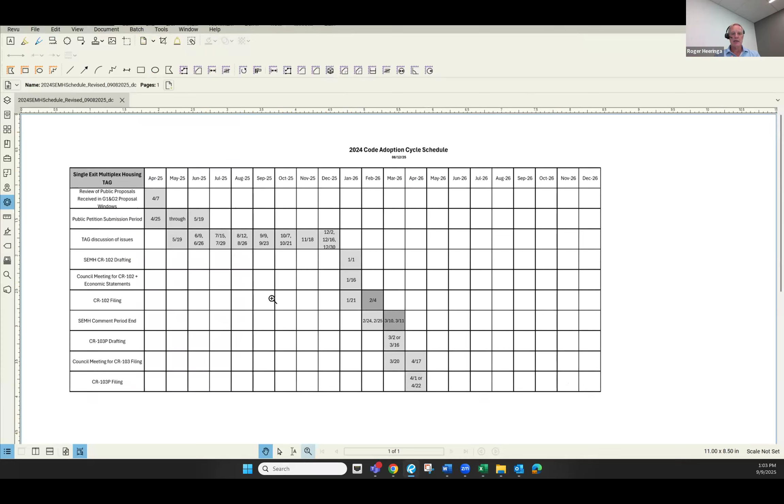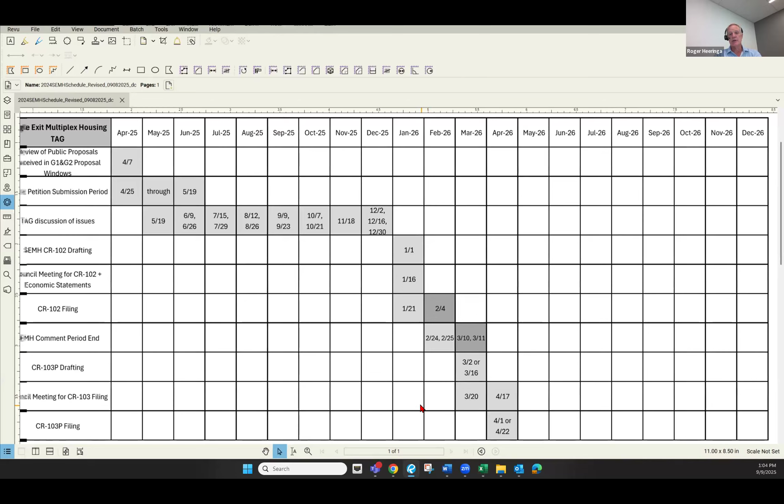So as part of the introduction in the meeting minutes, there is a schedule document. Dustin, if you can bring that up. I wanted to introduce this; it's kind of been an ongoing conversation. I know Patrick has weighed in, I appreciate that, but just what is our path forward? So Dustin and I have kind of worked backwards a little bit, and currently the CR is kind of the

end of January, the 21st or 24th is when we file the CR 102. What that means is after that, there's a comment period, a public hearing, and the drafting of the CR 103 document that gets final approval. Council, the CR 103 filing approval is at the council meeting on 3/20. I think the filing is 4/1 or 4/22. There's certain times when we have to file those.

Right, so some of this separates out. For the filing dates, we're using the code revisor filing deadlines as those dates. They could happen a little bit before them, but if we file before those dates, those are the dates we have to plan from. So the comment periods, if we filed on 1/21, it would end on the 25th, which gives us time for 2 hearings on either side of the state. Same thing with these darker ones here indicating a separated timeline, if we needed to file one filing date after that, then we have some dates in here, showing options for us to finish by the end of April.

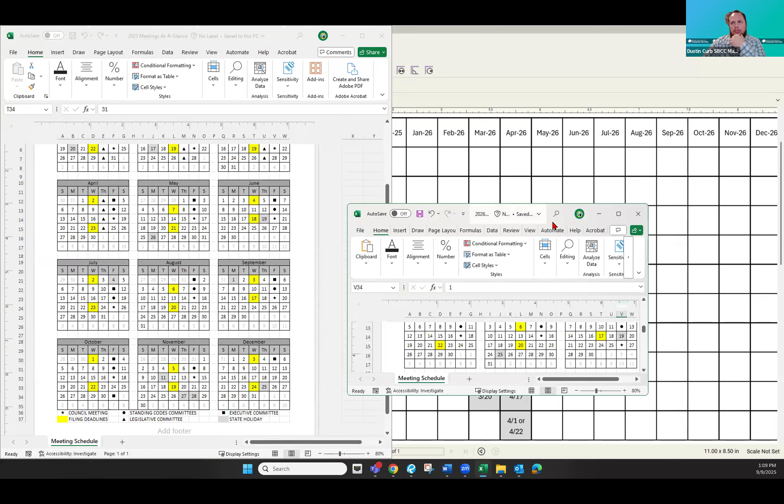Okay, go ahead. I'm just going to show some calendars that I have, to show kind of what we're working with, and maybe the changes that were made from the draft you last saw, Roger, before this got posted.

On the right here is a 2026 at-a-glance calendar. On the left is a 2025 at-a-glance calendar. These show our plan at the moment, following the same format as our 2025 meeting schedule. The yellow squares are filing deadlines, and the gray squares are holidays and things like that.

In September we did have a cadence of meetings. Today is the 9th. We would meet next on the 23rd, then the following ones would be the 21st, and then the 4th of November.

This week right here is the proposed week of hearings for the 2024 codes, so we won't be able to meet that day because we'll be having hearings running through. We have a holiday on the 11th, and then we're set up for the schedule we showed earlier to meet on the 18th.

We would be going through December, and if we have issues, the dates identified are the 2nd, the 16th, and the 30th. I'm open to changes on that part of it.

As Roger said, we've only got 2 or 3 meetings per subject left in the year to handle these topics. I had 3 or 4, and I think single exit is farther ahead than multiplex. If we end up needing an extra meeting toward the end, 1 or 2, we may need to do that. Hopefully not, hopefully we can get through it.

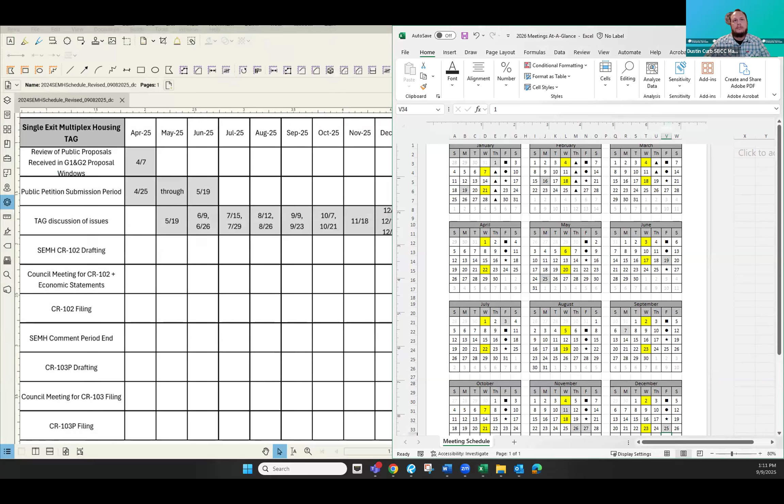Okay, Patrick, go ahead. I have a question for Dustin: is 2 full weeks in January going to be enough time for the staff to do the CBA and SBEIS for this?

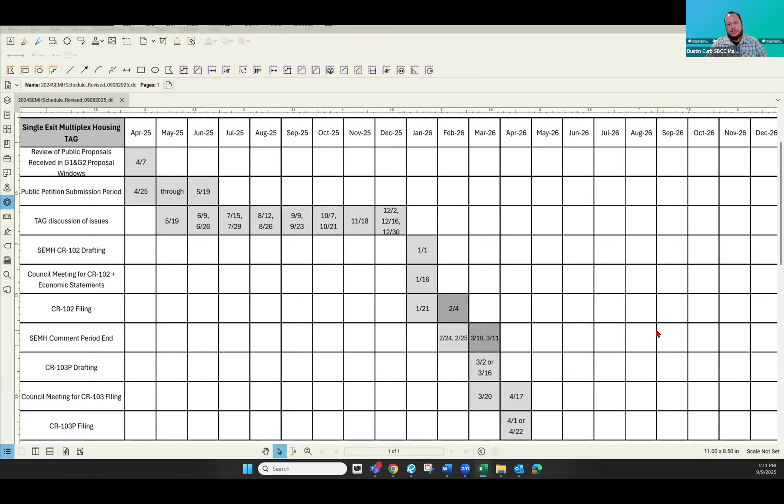If I have the information for it, yes, we should be able to do that. I'd like to have the technical language nailed down by maybe the second half of December, then have this group embark on that economic discussion with another work group meeting on economic impact for these topics as we approach January. I want to get that information by January, and if I can be set up like that, yes, I think that's a reasonable timeline. Okay, thank you.

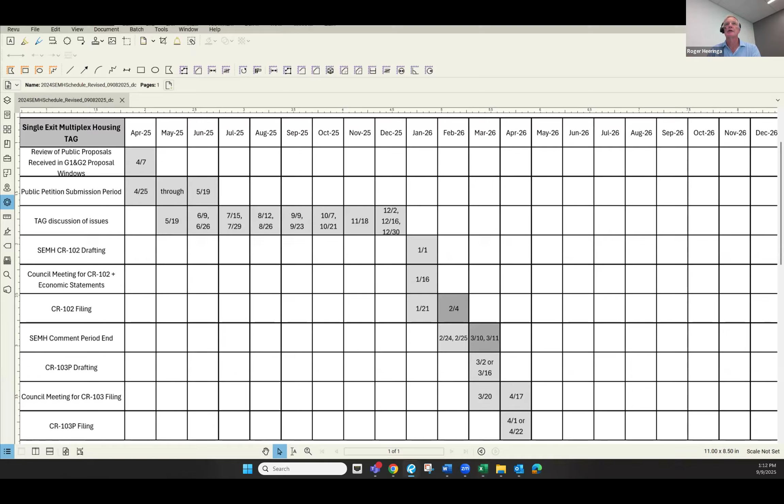All right, any other comments? That was a long introduction, but that's kind of where we're at, setting the table. So let's move on and keep moving. We have review and approve the agenda—if you could bring that back up, I could have a motion and a second, and then any discussion items.

So now we go to item number 4, which is the single exit work. Ardell, you've been doing an excellent job of working our way through that. I think the right way to do this would be to take where we left off on this spreadsheet with the issues item. I guess I will ask if you're willing to do that again, Ardell.

Sure, I'm not sure where we left off, so Dustin, if you can remind me there, I'm getting lost in our 4-week gap here. We left off on the 12th - it was the parking garage stuff, and we left off at amenity spaces within here. I just want to make sure everybody notices this got moved around as part of the stuff we were doing, to try to group it with other stuff we were talking about. But this doesn't have a discussion date on here or any input, so we left off at amenity spaces, and I'm getting the document pulled up here.

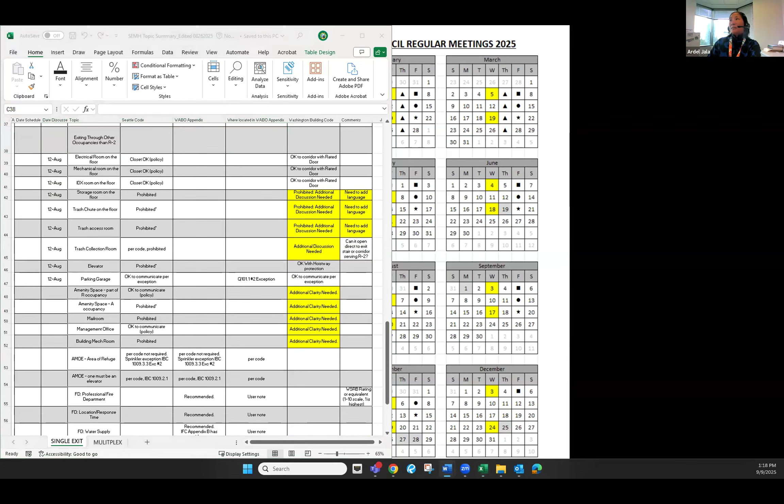Does it work if I show it side by side like this, or is it too small, whatever works for everybody, I can move it around. Works for me on my end. Okay, all right, yeah, that works.

So the code language is item 2, and all of these are about communication. So this list of areas where it says additional clarity needed - are we coming back to this right now? Is that our starting point, or do I go to area of refuge afterwards? I think let's do the area of refuge here, and we can circle back to this. It's been a while and I've got a lot going on with the other codes, but I believe we did talk about this - I don't exactly know specifically when and how that's all interconnected, where this note came from. So I have to go back and check some notes, but let's start at the area of refuge.

The area of refuge - because the presumption is that this is a sprinkled building, it would then comply with the sprinkler exception. So there's no provisions within the single exit baseline proposal to do anything beyond code - a single exit building that is sprinkled would not be required to provide areas of refuge.

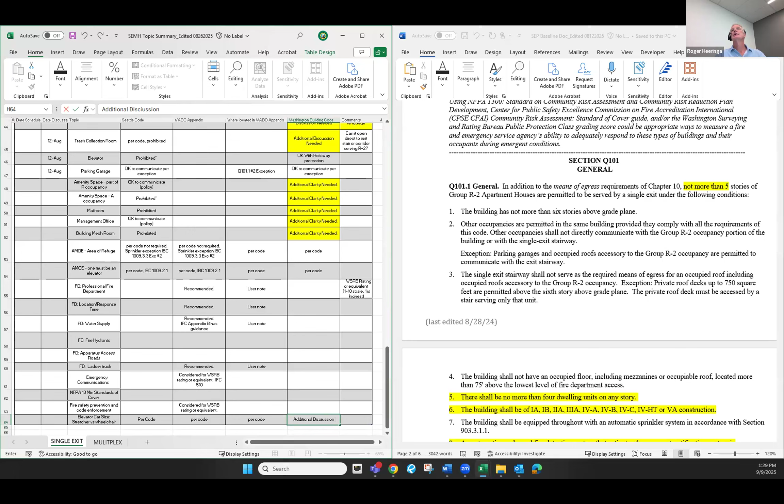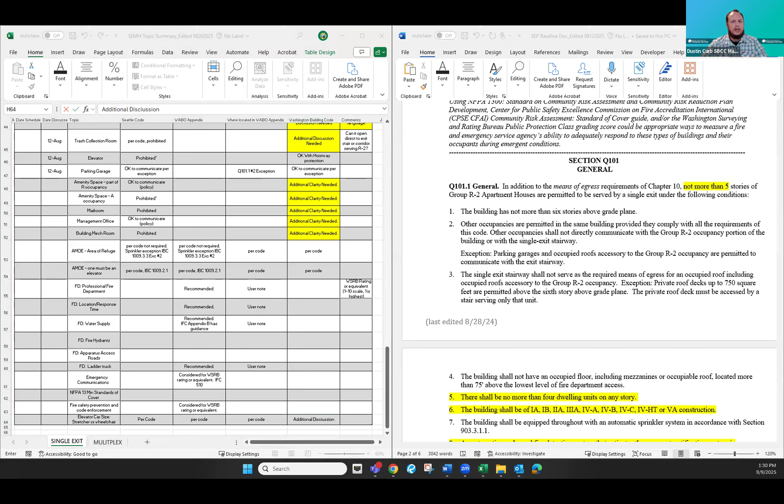Do you want to bring that up, Dustin? Yes. So first, I'll have down the WSRB rating document that we have up on there. And I think it addresses our next line - we have talked about what a professional fire department would look like. We may have shown this briefly as well, but we don't have any notes in our spreadsheet for it. And I believe this came to us from Dave Kokop. Yeah, Dave, your hand is up - you want to comment?

Yeah, I apologize, I was not in the last meeting, but in further communication with the Washington Survey and Rating Bureau, they have requested we do not utilize their data for code basis for this tag or for other building codes for the state - it's just for their customers. So that is the reason why we have this separate criteria: the fire marshals group that participate on this tag went together and put together our documentation of what we felt it would be, as WSRB has requested, please don't use our information.

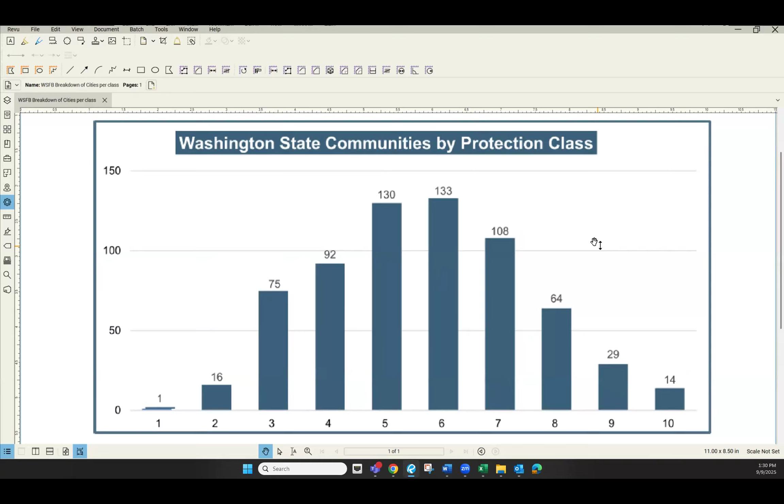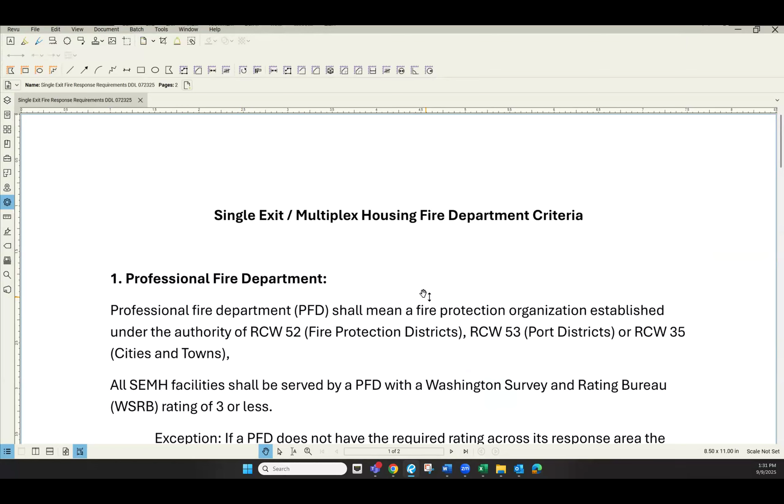So the numbering system is good for us to look at as a baseline, but we've got to come up with our own language. We can't say if you're rating a 3 or less, that needs to be removed.

Now, there is some general discussion as to what those bases will be. I'm not sure where we're at with that, Mike. So, Dave Lynham, you were talking about some of that. Unfortunately I missed last meeting, so I don't know if you have any other background, Mike. Yeah, I think where we went back to, since we've scrapped WSRB at Bob's request, is coming up with prescriptive criteria for the fire department, and that's where we've left off and what we really need to dive into discussing. I think everything else we were pretty in agreement on.

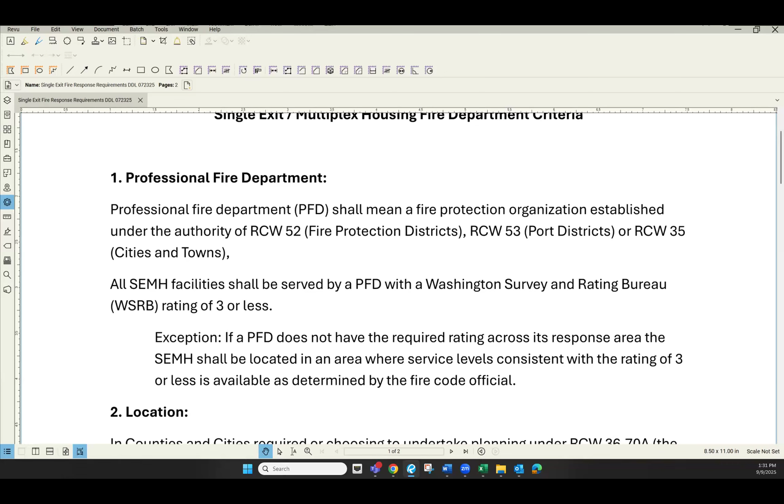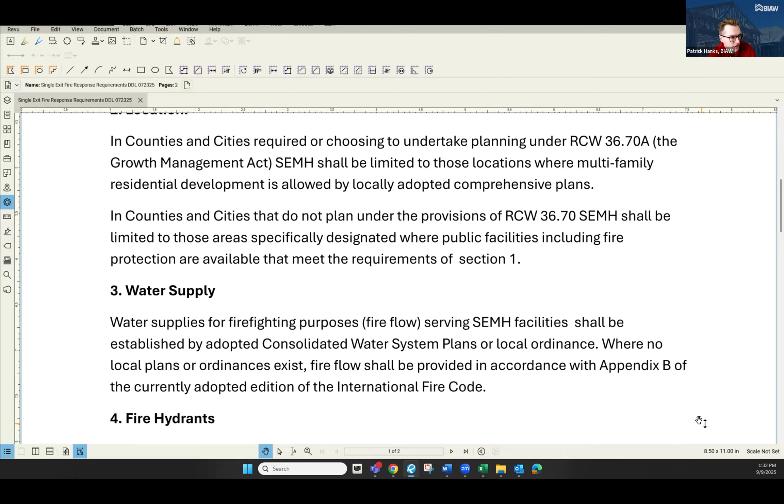Patrick, go ahead. Well, I'm glad to hear they were not using the data. I was concerned that having it be 3 or less would leave out the lion's share of cities from being able to utilize this code. I understand legislation says to consider, I forget the exact terminology, the fire risk and fire provisions. But we want to make sure this is going to be a widely available option, and not heavily restricted to just a small minority of cities in the state. So I'd be interested in hearing more about what certain qualities or how you're going to be making that determination without using the WSRB data.

Thanks, Patrick. I was about to try to pull up the legislation, if I can find it here. Oh, you have it? I can pop it open. Sorry, you've got it. Oh, and that's not it. Substitute Senate bill.

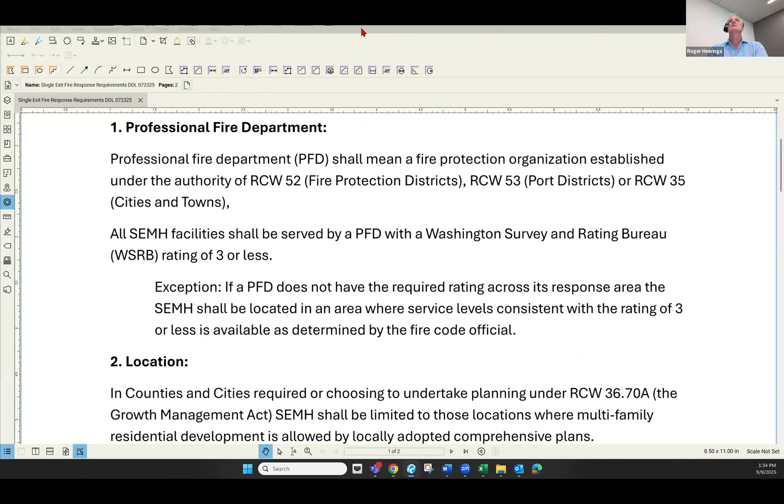So Dave or Mike, it sounded like you have a definition for professional fire department. What is our backup rather than a WSRB rating? We've got a document going around that actually defines a professional fire department, really trying to write a definition based on the RCW definition. Dave Lyman isn't on, but he did a really good job of putting together a baseline that calls out RCW 52, 53, and 35, which also includes the entities allowed to establish fire departments.

But the biggest thing we're looking at, diving down to what that professional fire department actually is, is the response. We feel we've got a really good handle on dealing with water supply. There's existing code we can lean back to, Appendix B for fire flow, and Appendix C already tells us where our hydrants need to go, so we can bring that in. Fire apparatus access roads is controlled by Section 503 of the Fire Code and Appendix D. So we have a really good place to go that is already international code language.

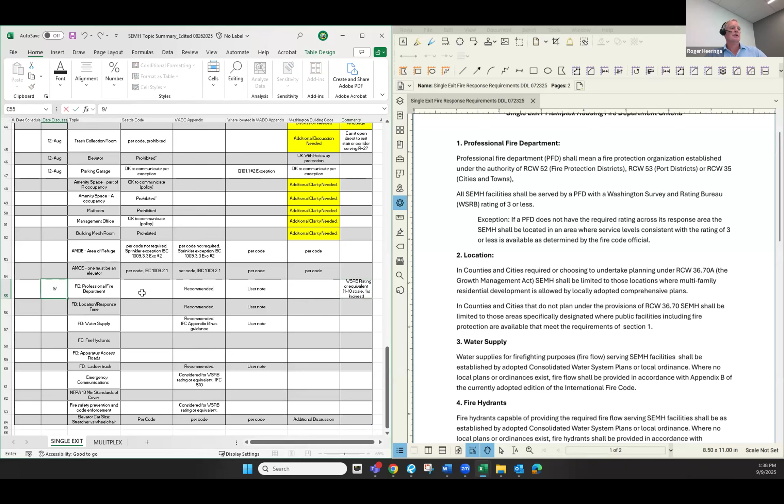Okay, I'm going to then suggest that we postpone all of those fire department, at least all the FD ones that we've got there until the next meeting. And if we can get that information, I would ask Mike to get a draft now if you're still kind of trying to clean up the professional fire department. That can come later, but let's get it out, probably send it to Dustin so he can distribute it out to the tag members.

I was also going to add that we are involving other fire groups, so the fire chiefs for instance, and some others, to provide some feedback on us. It's taking a little bit more time than we thought for that. But we're trying to get as much involvement of each group of the fire service to be able to provide us good information so that we don't put something out that they're not going to be too happy with. So we want to make sure that we have it right before we bring it to the tag.

Okay John, go ahead. Yeah, I was just wondering Roger, if we really need to postpone all of them. I mean, water supply, fire hydrants, fire apparatus access are all basically per code, right? So if I'm understanding that correctly, or at least we can point to the appendices that they're referring to in that document on the right on Dustin's screen there. So I think we might be able to dispose of those at least and not have to come back to them.

That's fine, I was kind of thinking we might hit them all at once, but Dave, go ahead. I was going to add that one of the things that is a concern within the language here is we talk about the fire access roads. It doesn't include the addition of Section 503, and Section 503 is not adopted by the state. So that is one of the problems I had since I was on the council, trying to get that kind of fixed, because it basically removes the fire access road requirements and puts it into the local hands.

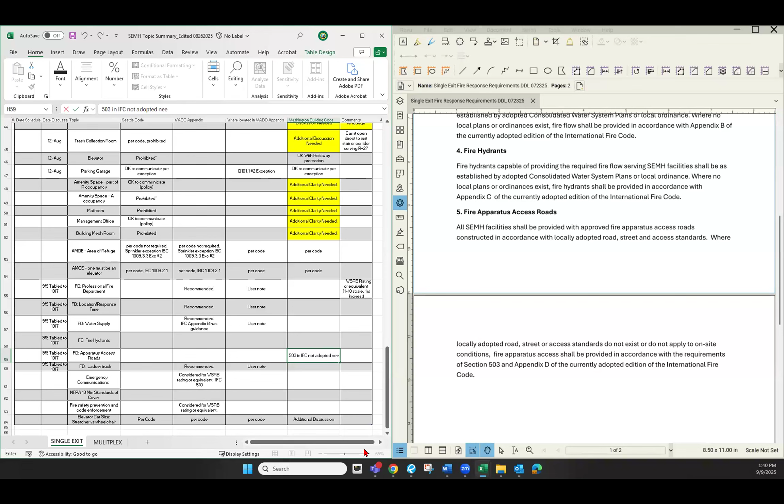So which ones are per code then? The water supply and the fire water hydrants? Yes. And you said the fire hydrants as well needs to. Yes, fire hydrants and water supply are per code. Correct.

And you can take the tabled, yeah, take those two off. I'm going to ask, is there anybody, again, we will have time to go back through this. This is kind of our first pass, and I know we're going to want to look at everything together, but anybody have concerns about the per code for those two?

Hey Roger, this is Messer. I just want to add one thing about our per code for the water supply and hydrants. We are taking those from appendices, it's Appendix B and Appendix C. Both of those at the local level are typically not adopted. So what this would do is force those jurisdictions to use those appendices when building the single exit or single stair.

And is that an appendix to the fire code or the building code? Appendix to the fire code. Yeah, and I do think we need to be careful. I know as part of we do have a consideration, I can pull up, I think that we are directed to put this in the building code.

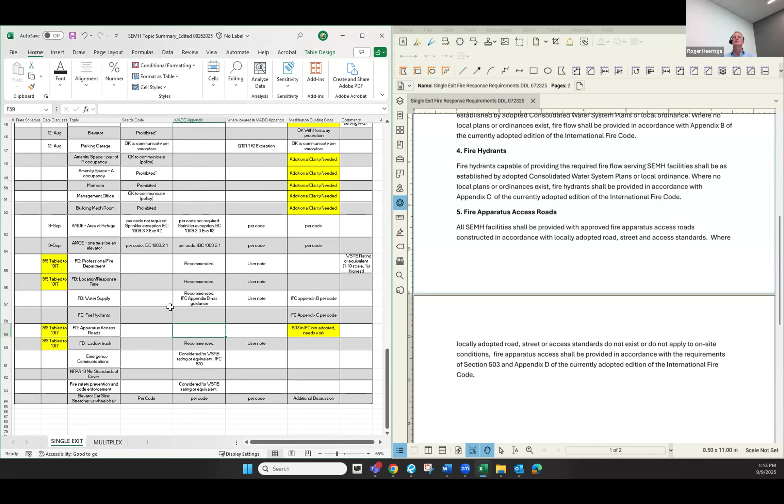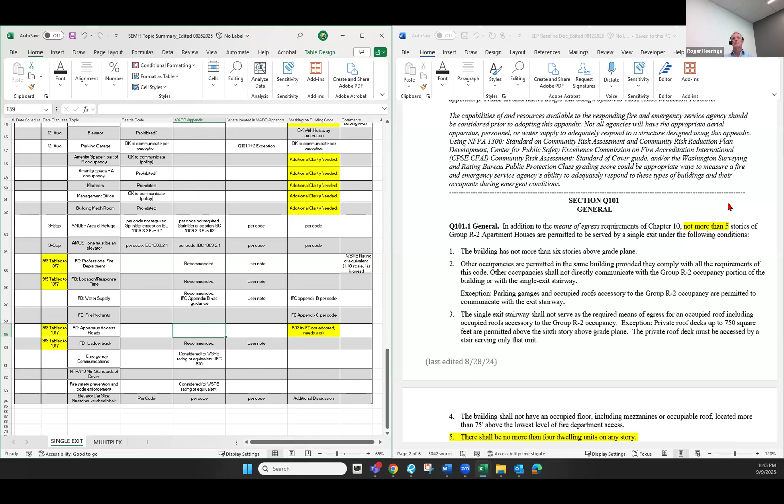Yeah, I do agree, we need to be very clear with that. Maybe it can be dealt with in the user note up top, since per code is still building code. I just want to make sure that if we're relying on a fire code, is that included? Are people directed to that? I think you can direct them to that in these provisions here. But I wanted to note that the user note is going to have to change substantially, based on what we're doing. Remember, we wrote that originally thinking this was going to be optional, so that's going to need some substantial editing.

Well, if we can just keep that in mind - there is a fire code, building code question.

Emergency communication - I don't know if this is Ardel or Dave or Mike who wants to take emergency communications. I'll lean on my colleagues for this one - I'm not remembering what the emergency communications was covering. Was that two-way communication in the stairwell? No, I think it's just built into the WSRB rating - the 911 PSAP system.

Yeah, that's what would be part of the WSRB. I'd have to look to see what else, but as far as your PSAPs - public safety answering points, your 911 centers - fire departments have very little, if any, control over them. So I'm not exactly sure what we could even write other than that a 911 system is available. I concur, Mike, because it's very difficult for us to say any particular requirements. I think we just have to say there has to be a dispatching process or dispatching capability for that jurisdiction to be considered.

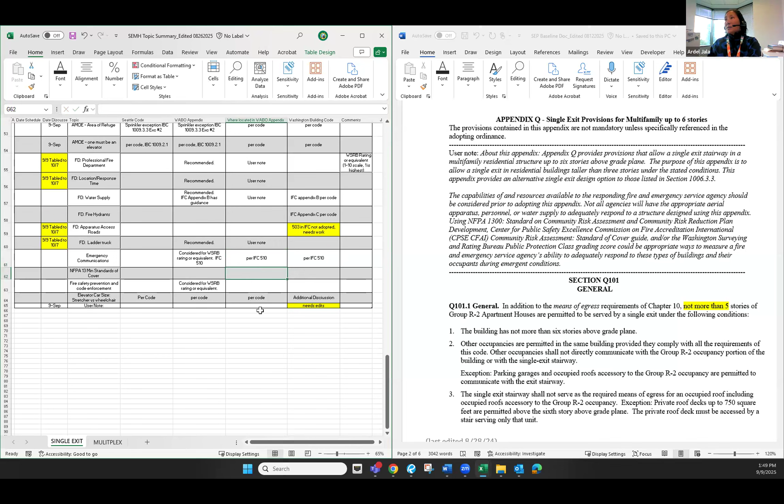NFPA 13, minimum standards of cover. I can start it and then I'd be happy to pass it off to our fire colleagues. Where this is covered in the proposal is item 7, so if you want to scroll down, Dustin.

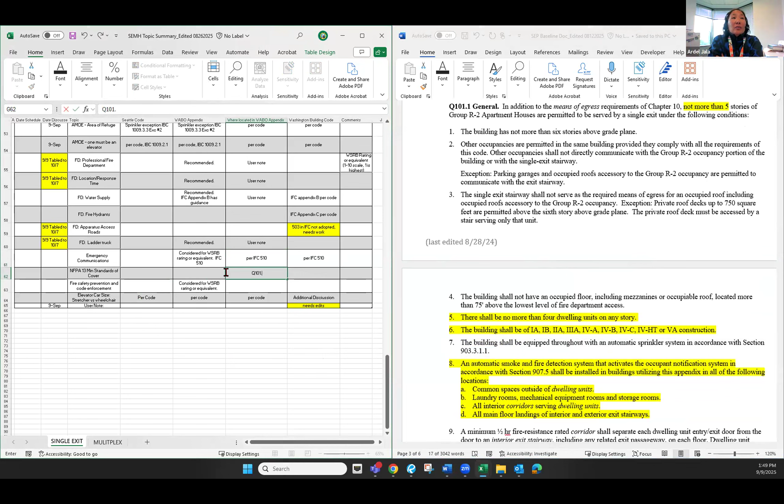This is again what's mitigation. And so in the base proposal, it's requiring a full 13 system. Dustin, I don't know if you're able to bring up Washington State Code for 903.312. One moment. But really at 5 stories, the base code already requires an NFPA 13.

So where this is impactful is that a 13R is permitted at 60 feet in 4 stories. Do I have that right? I'm going to defer to my fire folks on the call. Yep, okay. And so this is an enhancement so that if you're using a single exit, you would always be required to use a full 13 system.

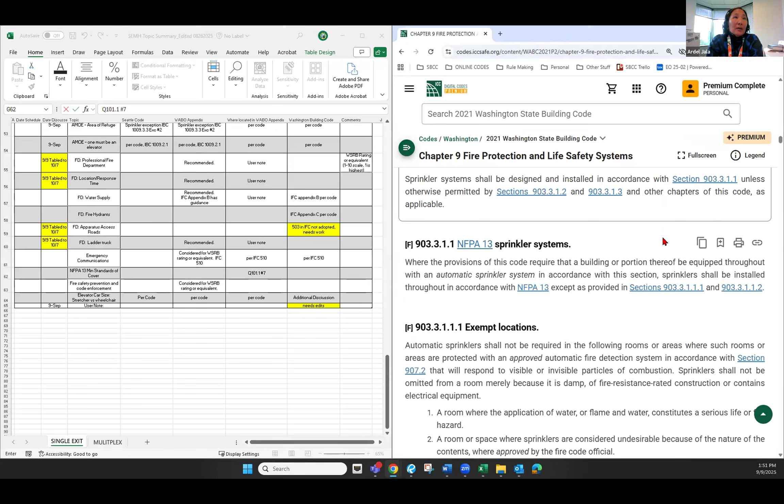And then Dustin, if you don't mind scrolling down to the 13R scoping, thanks, that's where it is. Up to and including 4 stories in height and buildings not exceeding 60 feet above grade plane. So a 3-story building with a single exit would be per the table. A 4-story single exit can use these new single exit provisions, as can a 5 and 6. But the 5 and 6 is already required to use full 13, while a 4-story, if per code, is permitted to use a 13R.

What the WABO work group decided was to require the full 13 in all single exit buildings. There's been debate about that, whether to require it or not, but that's where we landed. And then the difference between 13R and full 13, again, I'm going to defer to my fire colleagues on that.

Ardel, I think you hit the majority of it. The other difference between 13R and full 13 is your flow coefficient, so you're getting double the water flow. Your 13R is 0.05, so that's a 2-head, 26 gallons a minute, or a single head at 17 gallons a minute. When you get into your 0.1s, which is light hazard 13, it's 35 gallons per minute, so you get more water flow onto the seat of the fire, whatever head activates. Another big difference between 13R and 13 is the dedicated fire line. 13R is similar to 13D, where you can tap your fire line from domestic water. In this case, you get a separated dedicated fire line that runs your 13 system. And then the last difference is it's a full covered system, where your 13R only covers occupied spaces.

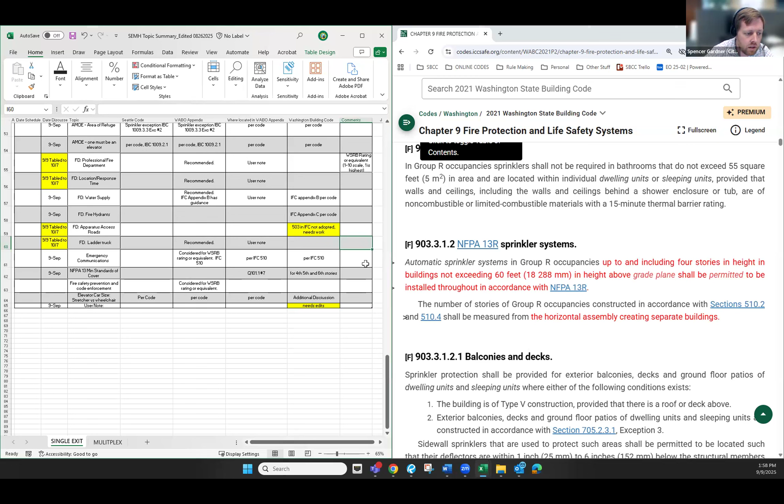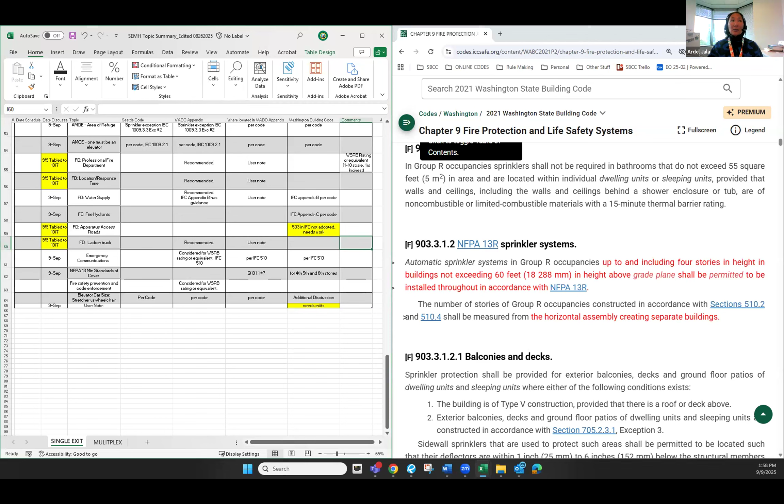Yeah, just a question. If we were to decide that the 13R is acceptable for a 4-story building, it sounds like that's already in the requirements. So essentially, it would be a question of just striking the NFPA 13 requirement from the appendix, and there would still be the full 13 protection for 5 and 6 story and 13R protection for 4 story. Am I understanding that correctly? That's correct. If the committee makes a decision to maintain a 13R, then you would stick as base code. If the committee is seeking to maintain all single exits using the appendix as full 13, then you would maintain item 7 in the proposal. Thank you.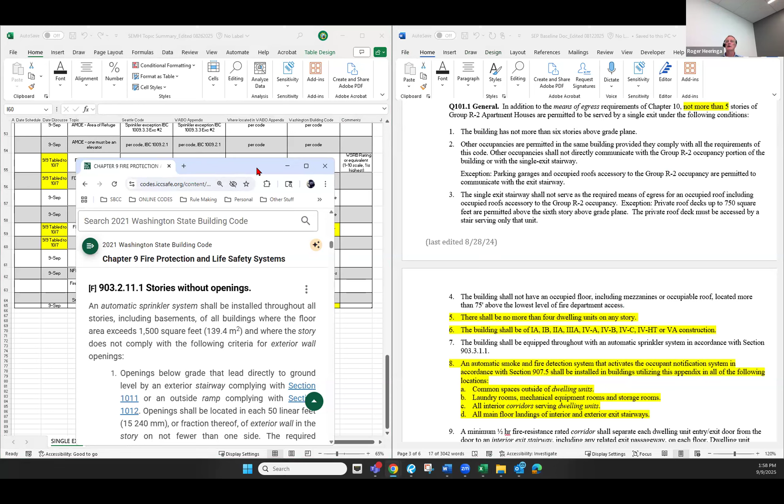And I'm fine, if there is continued conversation about that, we can revisit that. I think it's a good conversation. I certainly understand it's a reasonable enhancement as far as I'm concerned, but I agree with Todd, what added performance is it? Are we getting, and I'm also just asking for kind of a ROM cost, what is the cost for that enhancement?

Spencer, go ahead. Yeah, it sounds like, well, I'll just say I would prefer, I think, to keep it at the base code. Okay, if you're soliciting different opinions, there's mine.

John, go ahead. Yeah, okay, I would support keeping it as the full 13, mainly because of keeping in mind that the 13R at 4 stories is predicated on 2 exits. I mean, it's not predicated, but it assumes that you're going to have 2 exits. Yeah.

Okay, well, let's, Dustin, I guess we need to note that we will revisit that. I think there are multiple opinions, so however you're marking that, I forget exactly.

Ardel, I was going to ask also. I started writing some things down, but eventually I think this committee is going to have to come up with a list of the enhancements. It would be a good summary as we present it to the public and to the full council: here are the enhancements we've asked for above code. I don't remember them all right now, but eventually we should be able to explain that.

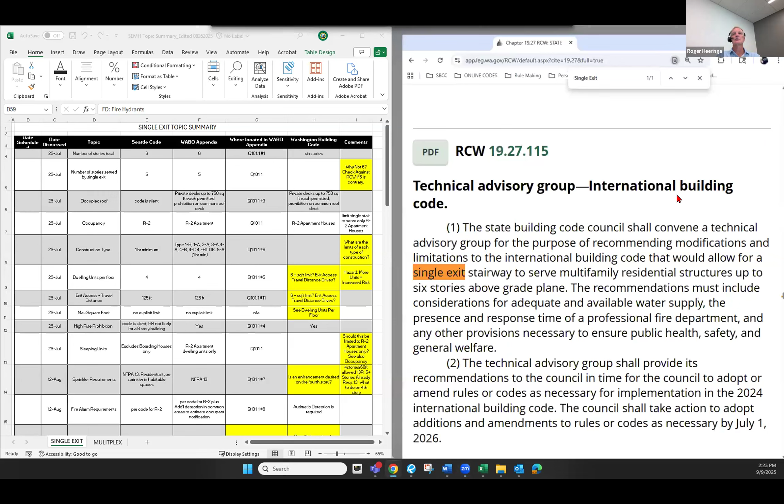When I read this, the question on number 1 and 2 is it's 6 stories - whether we are allowing 6 stories, however, the single exit only serves the upper 5, right? And the ground floor is served by either direct exit from the units or a different means. So question number one is, do we meet the language of the code? When I read the first sentence - limitations to the IBC that would allow for a single exit stairway to serve multifamily residential structures up to 6 stories - this is my opinion, but by allowing a 6-story where the upper 5 levels are served by the single exit and the ground floor is served by another means of exiting, that would be the recommendation.

That would allow for a single exit stairway to serve multifamily residential structures up to 6 stories above grade. I think that if we limit it to 5 stories for the single exit, I believe that we are meeting the RCW. I don't have a legal opinion, that's my opinion, but then there is the question, do we allow the single exit, basically all 6 stories, to go through the single exit and exit out? Is that - Ardel, am I saying anything contrary to your understanding?

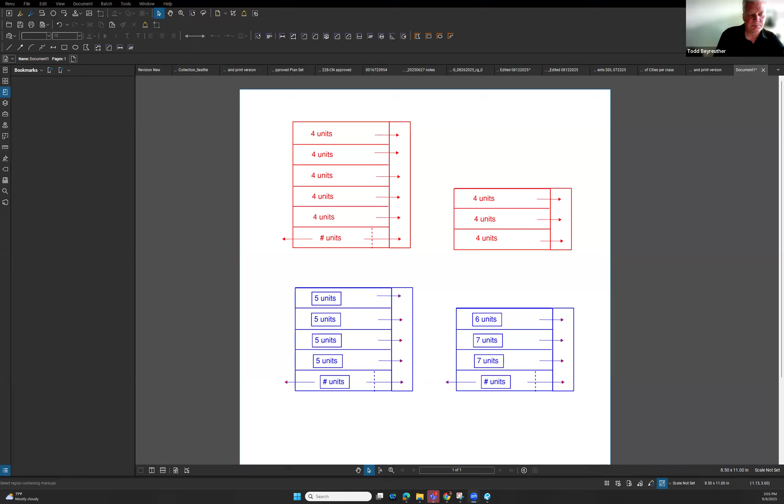John, go ahead. Yeah, so in answer to Rich, I think the number of actual people, I don't think there's going to be a bottlenecking just based on that. You're going to be limited still by the overall travel distance, the 125 feet, and the 20 feet to the stair. So you've got 20 feet from your door to your unit to get to a stair, assuming we don't change that. And that's going to limit the number of units to begin with. There's only so many doors you can fit in that space viably. And even so, the capacity theoretically of a door is pretty high when you look at the width versus the occupant load. So theoretically, you can get like 0.2 inches per person, something like that, I can't remember exactly, but you get some big numbers. So I don't think the number of people on a floor will be the issue.

Yeah, builders are very creative, and architects and engineers are very creative, and when we see it on the other side, it's kind of mulling through Roger's proposal. Oh believe me, yes, I know what you're talking about. However, I think the other safeguards and guardrails in the system in the proposal will prevent some of that from going too far. And I had something I was going to say to Roger, but I forget what that was.

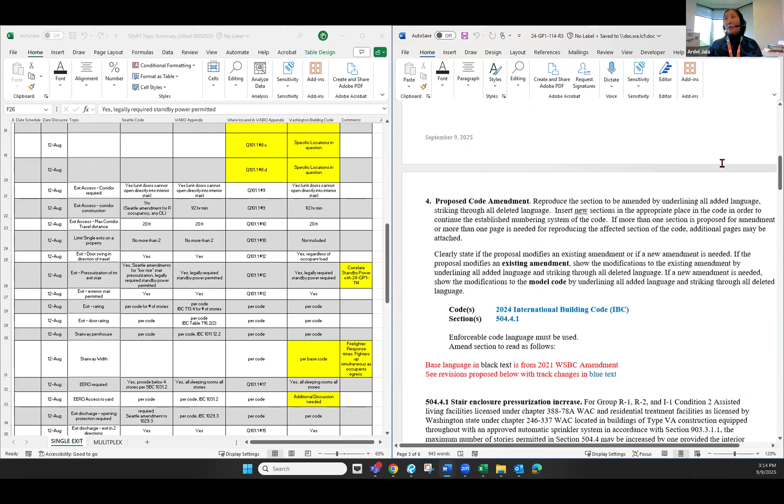I know that Seattle has a different allowance. So is that then punishing Seattle and Bellevue and maybe other jurisdictions that do allow tap ahead of the main, that would not be allowed in this proposal?

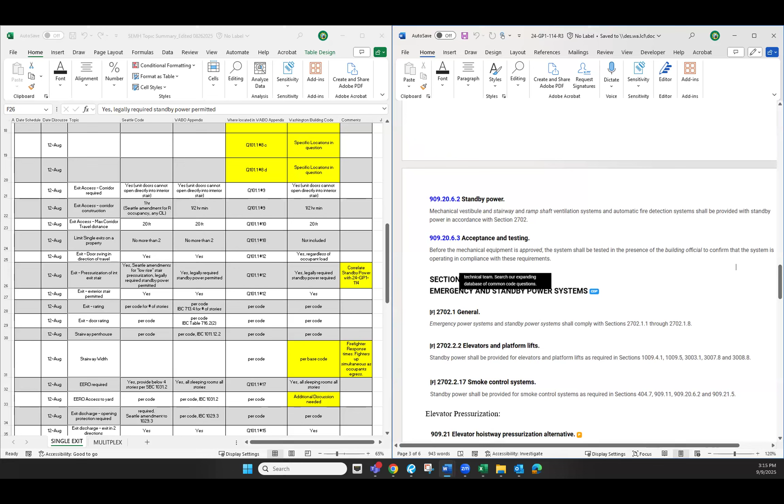I think I would interpret that as it's up to the local jurisdiction. It's that the local jurisdiction could make that amendment still. I would.

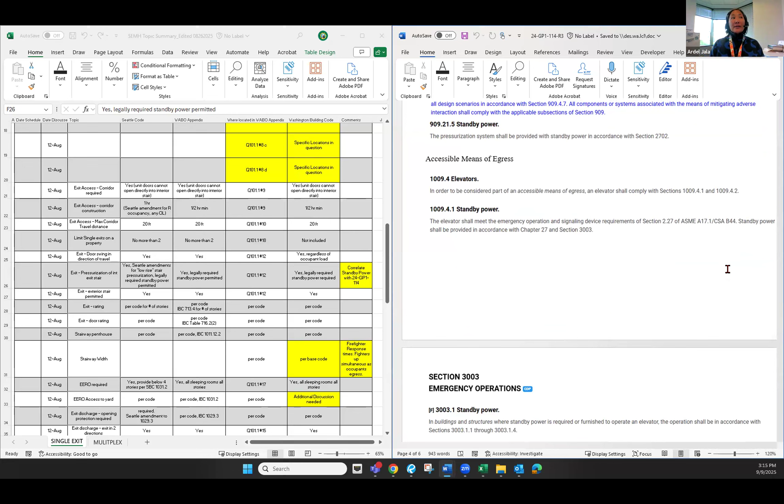But as a state proposal, I think if you're going to allow tap ahead of the main in this appendix, then it needs to be discussed as well with other legally required standby power requirements at the state level. Yeah, I was just seeing that. I was thinking that this proposal would allow legally required standby power, and then it's up to each jurisdiction. I was seeing that this actually prohibited tap ahead of the main power in this proposal, which then would not allow Seattle to use tap ahead of the main.

That makes sense. Yeah, John, I think what Ardel is saying, though, with certain caveats, is that the jurisdiction could amend this, and I would expect that. I will continue to push for the amendment. Locally, similarly to how we currently allow that amendment where the state would not allow it for the story increase, we allow it for the story increase. Seattle has different requirements for the story increase even, so, yeah. Correct. Thanks.

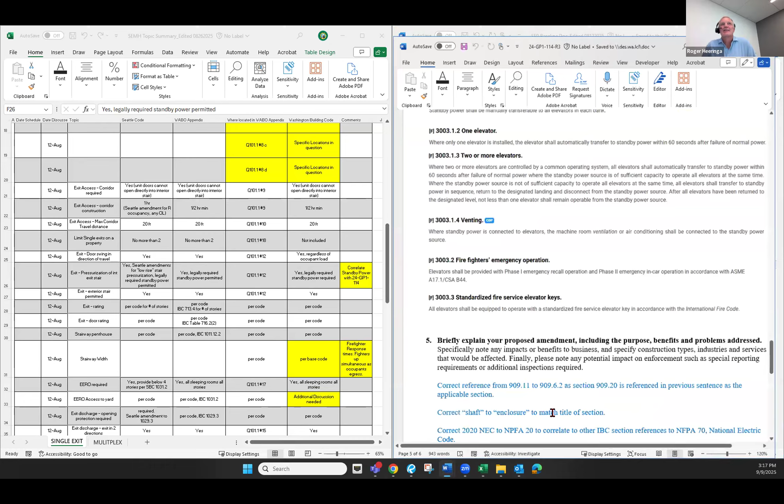Roger, real quickly, I'm not an electrical engineer either, but having dealt with this for a while, and the controversy, quite frankly, over tap ahead of the main - there are different ways of doing what they call a reliable source of power, or standby. One of them is a generator. The other, that other people have used, is supply from two different grids. Some buildings have access to power - downtown, Seattle City Light has two different grids that go through there, and you can tap into them separately. So you've got a second source of power that's reliable, the assumption being that you don't lose both at the same time.

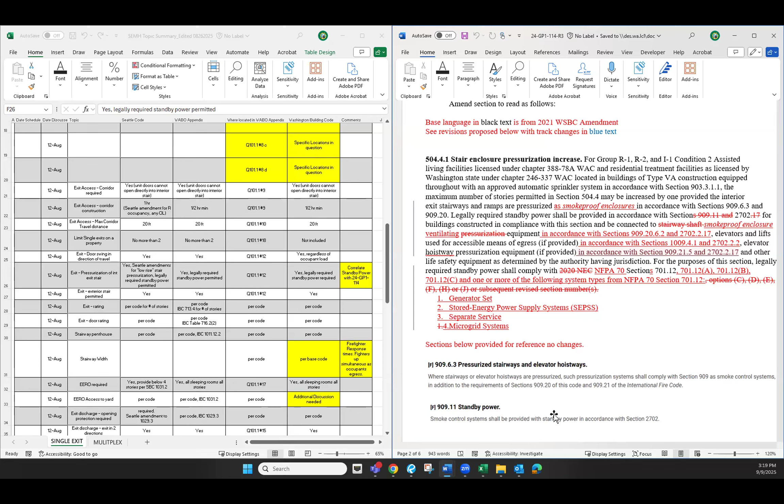I don't know some of the other ones, but the other one I'm familiar with is tap ahead of the main. Basically you have one line that comes to the property - one goes directly to the panel, your normal panel, so that's your normal power. Then there's another one, a tap off of that, that goes to a separate panel, and there's a transfer switch that flips on if the main panel loses power. Some people do not consider that to be a reliable source of power, because if the grid goes down, the building loses both sources of power.

So there's no backup if the whole grid goes down. Seattle has accepted that - the way I think about it is, if the whole grid goes down, you've got other problems. Okay.

So where are we at with this? I've got the 114 pulled up, looking at the standby power sections, they all refer to 2702, but is there anywhere specific here you want me to navigate to, Ardel?

No, I just want to flag that the language in the appendix should be consistent with the language here, for the purposes of this section. The last sentence: legally required standby power shall comply with NFPA 70. And this code change proposal is to align this section with the updated NEC, right? With the updated NFPA language.

And so wherever the building code tag ends on the recommendation for this section, the single exit appendix should have the same language. That's the language in yellow, just correlating standby power with this proposal. It's the same requirement for legally required standby power, and it should be consistent through the state code.

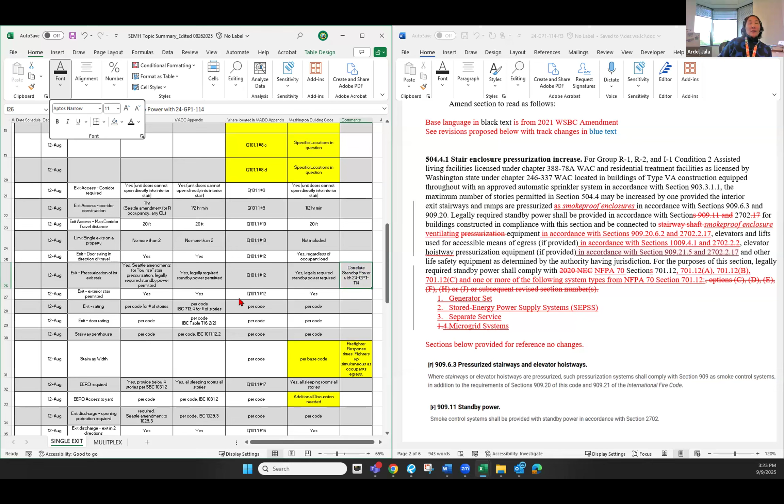And then the other item that was brought up today was the stretcher - I don't know, I think Todd, that was you. Is that one you wanted to bring up today? Sorry, did you just call on me? Yeah, you had brought up the stretcher requirement for conveyance.

Thank you, yep, so I was trying to come back to it instead of taking on another topic. It's more of a legislative request - it obviously did not pass. So it's a question that comes to the council, and if there are any opinions for or against, it would be helpful as we have a meeting in October with the legislature.

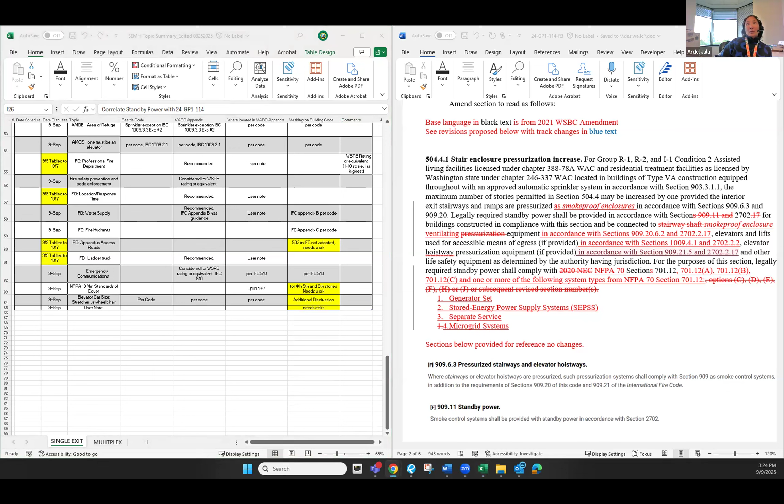So does everybody on the call know the issue? Maybe not. Todd, do you want to go ahead and summarize it, or do you want me to bring it up? I think you're probably better qualified. I could fumble around, but others on this call probably could do it better than I could. Thank you, hold on, let me pull up the state code requirement.

Dustin, are you able to bring up the stretcher requirement that's in Washington code? I believe it's in 30 - Seattle moves it around, so I apologize. Yeah, it's chapter 30, give me one moment.

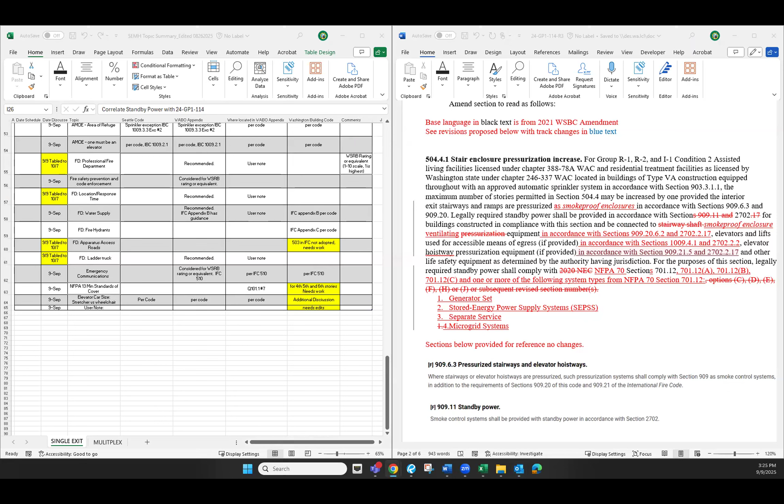Jonathan, do you have a comment while they're pulling that up? One other thing that went with changing the stretcher-sized elevator was to take elevators to an ISO standard. And the industry was really against that because there are no qualified mechanics for an ISO standard, and no qualified inspectors for an ISO standard. If my elevator inspectors inspect to an ISO standard, they will lose their current certifications.

Yep, this is the requirement, and it's any R1, R2, or I occupancy, regardless of the number of stories - at least one elevator shall provide fire department emergency access to all floors.

And so the proposal that's gone through both at state and to the national for the 27 code is, as Jonathan noted, to revise the elevator standard to the ISO standard, which is a European standard, from the current requirement, which is ASME - I think it's 17.1. And that would allow for a smaller elevator if you remove the stretcher requirement, which would free up more space that could be used for units.

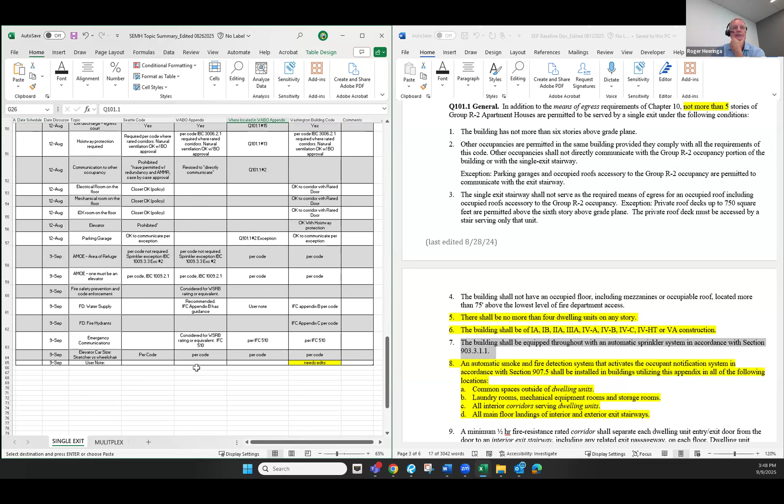What do we have left? I think that's all of them. Or there's the user note that needs some editing, but I think that's kind of the last task, and that's two meetings where we decide upon what direction we think we need to go.

My assumption is in a December meeting, whatever that date is, we would have the proposal itself updated. Eventually, once we get all of these decisions made, somebody probably needs to go through this WABO proposal and integrate the decisions we make into it, and then we can walk through. That December meeting would be the final walkthrough of the proposal.

December 16th - I would put December 16th on that user note, and also we need to integrate everything else into the version.

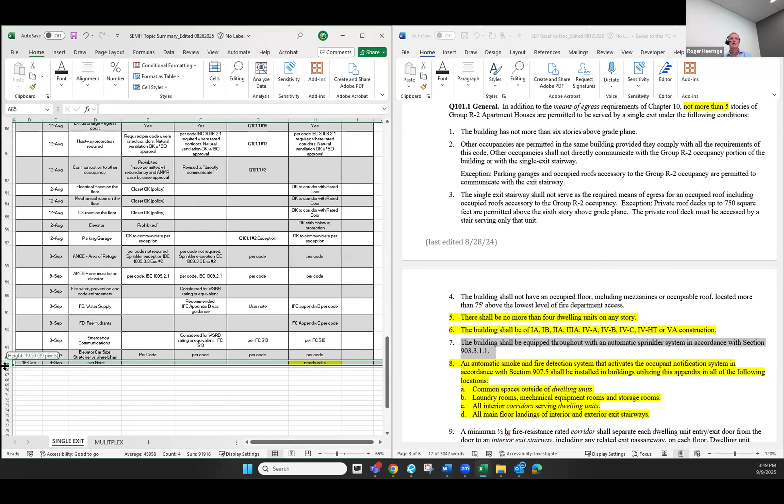Okay Todd, I think that's our schedule. I was just going to add, in case you haven't already, about the October 24th local government committee - just make sure everybody is aware.

I thought that was the 15th. Oh, that's probably right. So did you already mention that? We've spoken about it a couple times today, but not specifically the date and what's going on. The legislature asked the SBCC to update on some of our legislative tasks at the House Local Government Committee meeting on the 15th. It's also a chance for us to ask questions and clarify legislative intent if there are questions.

All right, anything else for anybody? Yeah Roger, I'm new to the group here, so bring me up to speed on that October 15th. Are we supposed to attend that meeting? Yes, so we have meetings - the full tag has meetings every two weeks.

He's asking about the legislative one - the House committee on October 15th. You're not required to attend, you're welcome to join in, but SBCC council members will be on deck to answer questions that committee might have for us.

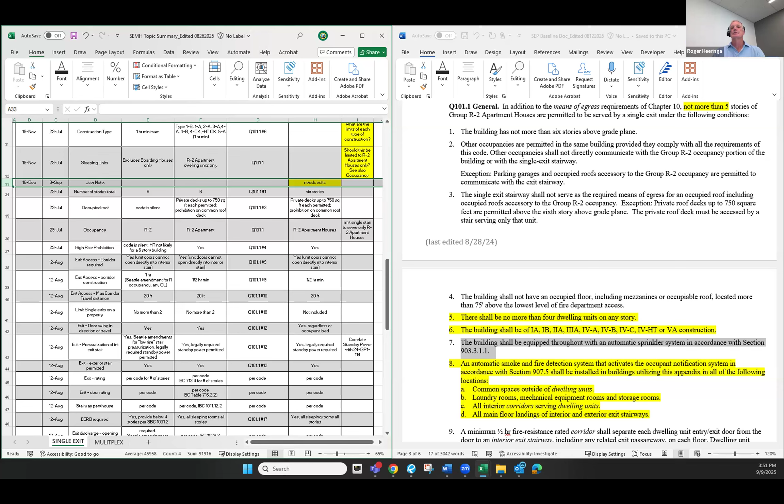Okay, any other questions? I guess I can officially go to the next agenda item, which is new business. Anybody have any new business? If not, I will give everybody nine minutes back to their day.